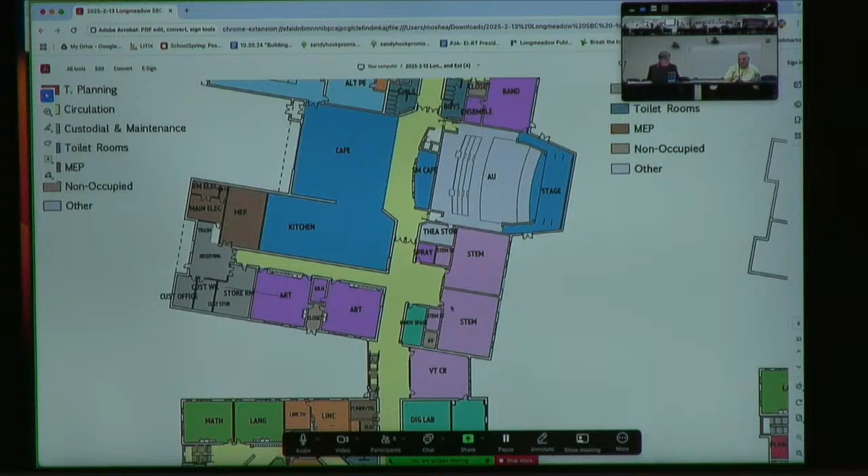Then you get into the STEM wing, which has an open classroom and two engineering classrooms. Those engineering classrooms are connected to each other and to the outdoors, with a plaza outside and some additional support spaces around them.

And we have an area in front of that which will allow that to spill out. We wanted those classrooms to be intentionally on display. They have a lot of really active learning going on, and they are closely connected to the art classrooms. The art classrooms wanted to be in this area and near the loading dock because they bring a lot of materials in and out, and they have a nice courtyard near them that they can access.

We met, and we'll be revising these plans further in terms of some of the minor details, but generally these configurations are working. We're in the midst of revising our kitchen plan, so the details aren't there, but the intent is you would flow into the cafeteria to the left, and there'll be a servery spilling out from the kitchen into the cafeteria area.

We're trying to work to create a bit more of a scrambled type eating area that gives students more choice. The idea being that if they have more choice and more options, then they tend to eat what they want, and then they tend to actually eat it. It's a really good thing.

The cafeteria, even though you see that yellow circulation path, that's open all the way through. At the district's request, we've created a slightly smaller space, part of the cafeteria that is a little bit quieter for students who want to not be in the tumult of the main cafeteria space. So we'll have a variety of seating, but also a slightly distinct space, and it'll be open to the cafeteria. It's not an enclosed space, but it'll feel a little quieter with a lower ceiling.

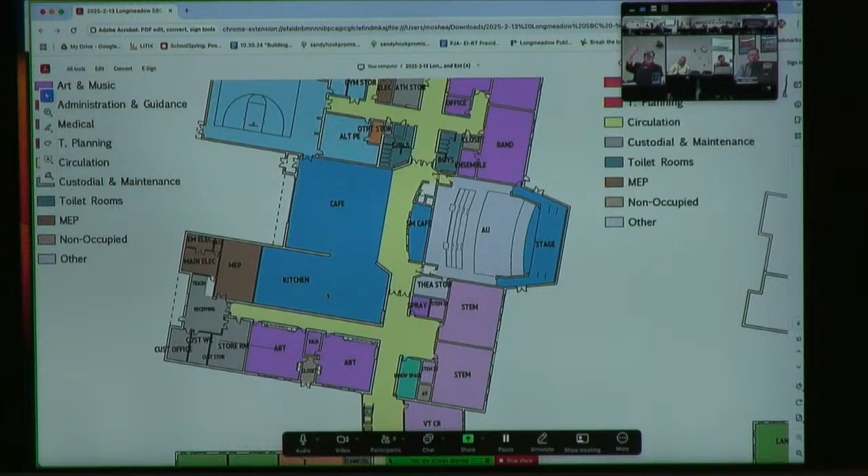We have our auditorium sized similar to the Glenbrook Auditorium, about 400 seats. So that's kind of coming along. We've tried to design this in a way that doesn't have an extremely expensive catwalk. It's not a high school auditorium, but it does have full seating, 2 decks sloped towards the stage, and the full 1,600 square foot stage.

Then you have band, music, and chorus, which connect to the auditorium through the band room, so there's kind of a back door in. And you have your health and PE wing: 2 health classrooms, support spaces, an alt PE room, and a gymnasium, which we've brought down a little bit in size from where we spoke. It still meets our court sizes, and it'll have some built-in bleachers, but since it doesn't need full high school size bleachers, we could bring it down a little bit in size.

Moving to the second floor.

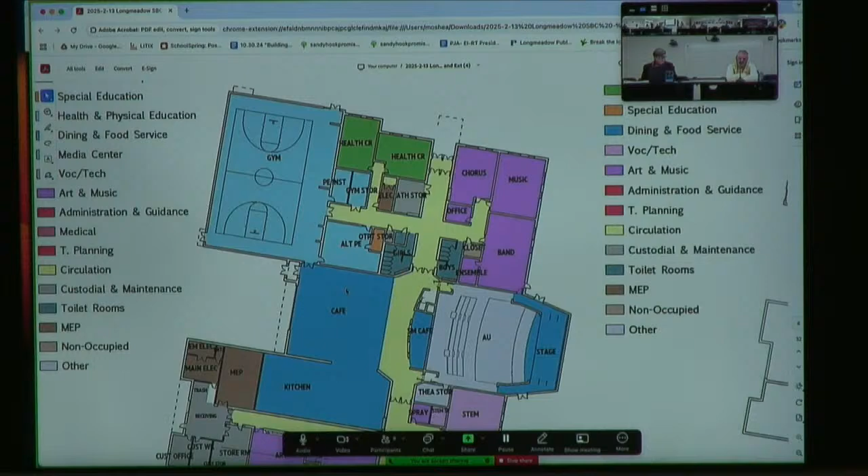Can I ask questions about this? Sure. This is what I learned from Chris early on: less angles and jags, everything is less money, right? Every corner costs money. So, like the STEM rooms, why aren't they just extended out to eliminate corners, or the next one too? You'll see when we look at the elevations and the massing, part of it is about the different roof locations and we're in a residential location. So remember, we didn't want to make a giant rectangle and just extrude up. Okay. For a couple of reasons: one is it would really overwhelm the neighborhood, the other is that you're actually trying to get light into certain spaces.

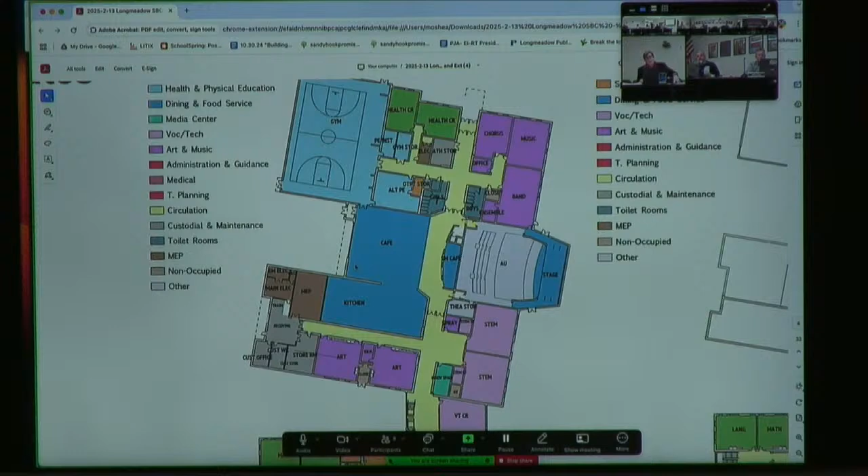At that particular moment, what we have is we've combined the gym, the band, the auditorium, all of that into pretty much one large mass. And then we're separating it, and we have another structural system for the next mass, separating it, and another for the next mass. Those separations between the 3 masses allow us to get light into our classroom spaces from the north and the south, and then allows us to efficiently put a lot of the rest where we don't have those needs together into one large efficient mass. Okay, and if anybody else has questions along the way, feel free. Some of the undulations are helpful when we're working on the exterior.

Just real quick, thinking about the band versus music, do you mind just clarifying the difference? Is that just to store instruments, or? There's 3 totally different teaching spaces. Chorus and music is just a standard all sorts of music program. Chorus is specifically chorus. Band is band and orchestra, so it's a large instrument room that seats typically about 50 students, with large instruments within the room. And because you have two instructors using that large instrument room, band and orchestra, there's also a small office that allows them to connect.

So we're trying to support chorus, band, strings, and general music in that space. Good question. Any other questions on the first floor?

Okay, on the second floor, starting. Oh sorry, another question. I know we're talking about bathrooms later.

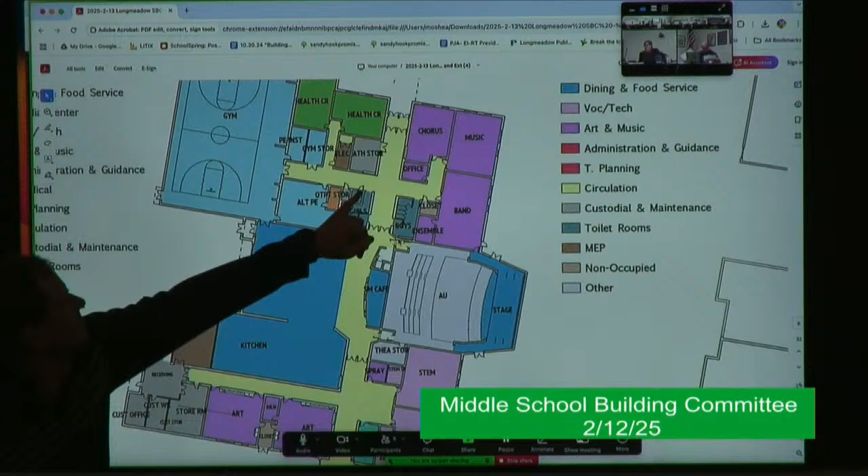Is there a gender-neutral bathroom? I said boys and girls there. Is there a separate space? So when you look at that area, we have a need for a lot of fixtures because we're near the auditorium and the gymnasium, so we went through an extensive review of bathroom options and approaches with the district. We're going to show you the end result in this plan. But wherever you see those gang bathrooms, you'll also see a non-gendered unisex bathroom associated with it. So that's evident there, but it's also evident in every wing.

If you look at what we call A wing in the south, and B wing, same thing - the decision was to have a male side, a female side, and a unisex bathroom all together so that it's in proximity to each other. We've reviewed different ways of configuring that, showing different options on the sink configuration, but we've also settled that decision.

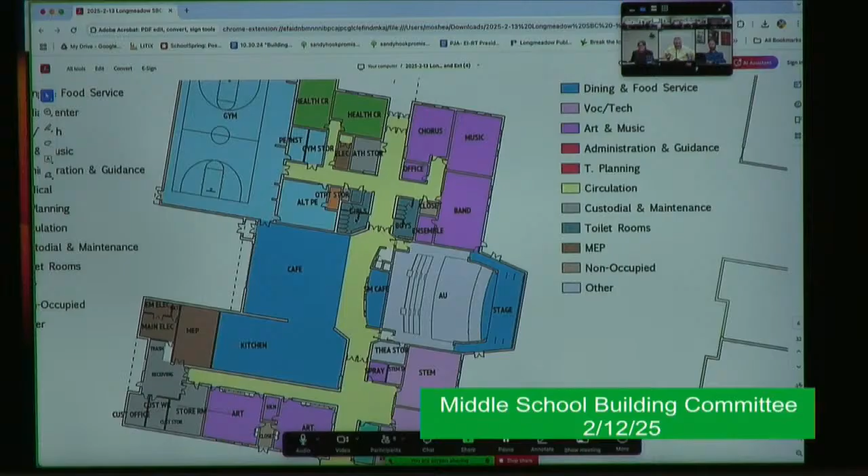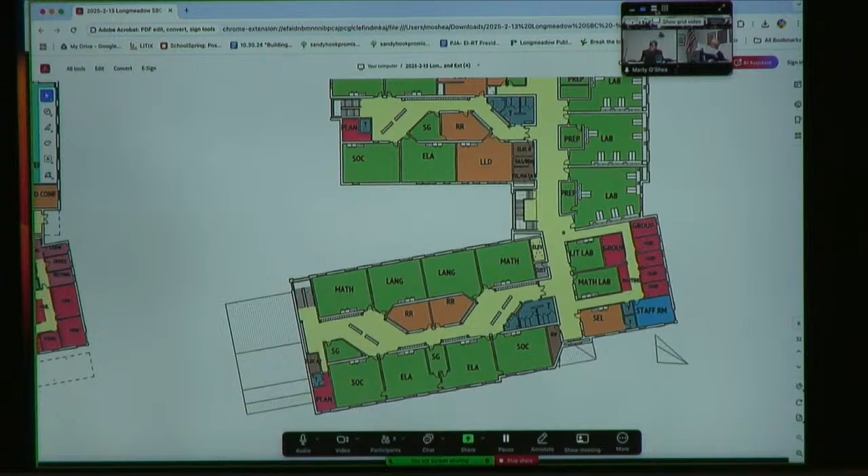Over the admin you have intervention, academic intervention areas - a literature lab, a lit lab, literacy lab, math lab, social emotional room, a staff break room, and the guidance suite. And we're going to switch social emotional and staff room - that was a discussion we had today - but that is kind of trying to be a bit quieter for students to pull into.

We've organized the labs into a sequence of pretty efficient spaces. All of these have to meet MSBA guidelines very strictly, so we found this efficiency would really help, and that's again why we have that second set of stairs. Each lab has its own 200 square foot prep room for storage and preparation of materials to go into the lab, and then there's one chem room that they share that's a locked storage room for chemicals.

So to be clear, the 4 labs you're seeing here are the 4 science rooms for 7th and 8th grade, 2 per grade. And the 6th grade science rooms are attached to the teams on the first floor - that 6th grade science section is a 1-story section of the building.

What about the guidance, is there 4 there? 4, and that would incorporate school adjustment counselors and school counselors. My language hasn't shifted over, but there's more counselors than guidance these days too.

There's an elevator in that A wing as well, serving the second floor. And then across from the 7th and 8th grade science lab is the B wing, which is the 8th grade second floor. And the elevator will not be used for storage, Nick.

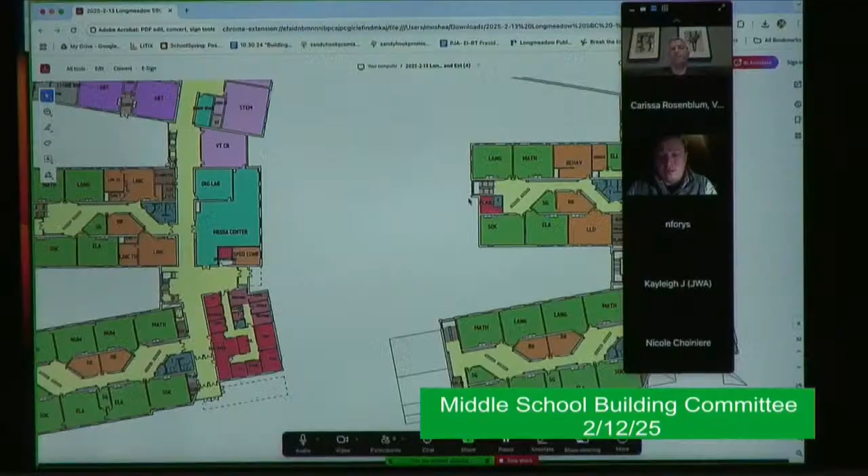I just want to acknowledge that Nicole is on the line. Choiniere, right? There she is.

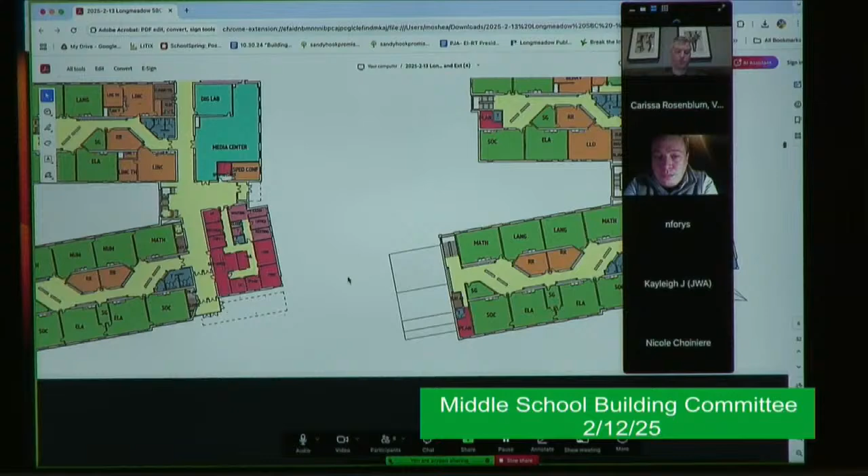Thanks, Nicole, sorry, I'm here. There's that special education conference room on the first floor near admin that is there intentionally to support family meetings coming into the district to meet with district staff. So there's two conference rooms. One is within admin, the other is going to be available probably for other reasons as well, but it's very heavily needed that there's a conference room to support those family conversations.

And I love the records right next to the room, so that's awesome. Yeah.

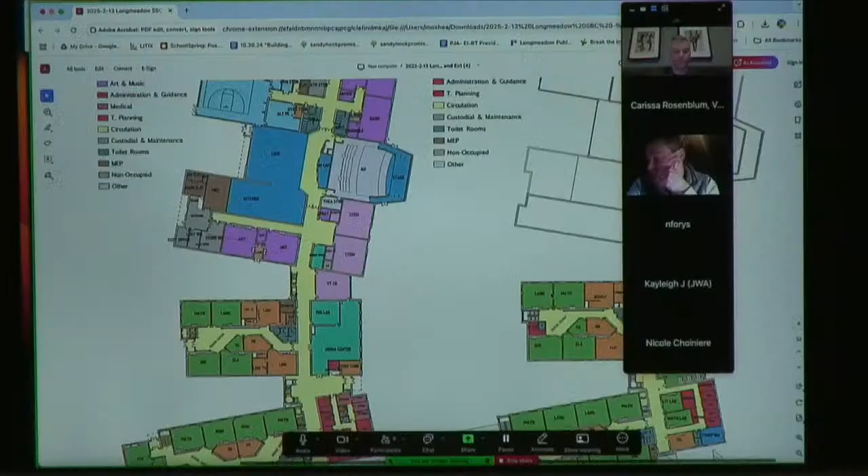Question, Tori. In the labs, I assume on the bottom those are like wash stations. What are the squares with the X in them? In the labs, on the second floor, exterior wall door. Yes, those are sink locations. So the way labs are designed, you can see on screen. These here? Yeah, so these I assume are sink spaces? Yes, exactly.

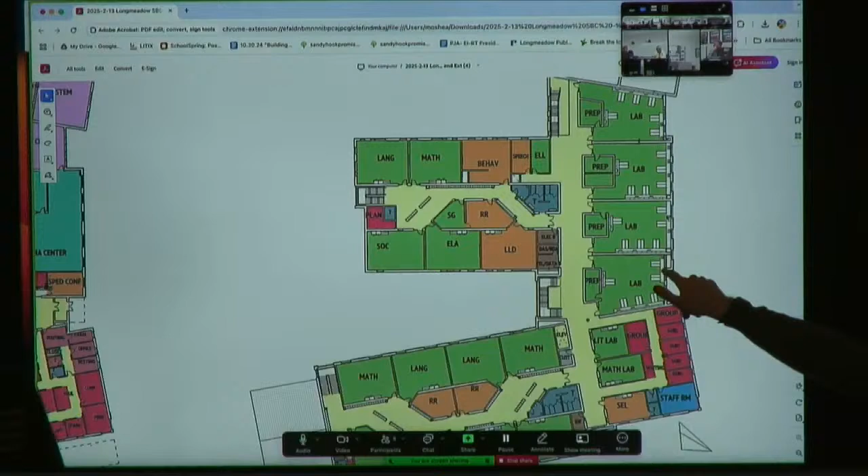The way it works is those parallel tables that are up against the wall are on wheels, and they're either in the middle for teaching, engaged with the teacher, and then they're rolled over and connected to the casework, which is at the perimeter. So for every group of four students, there's a sink.

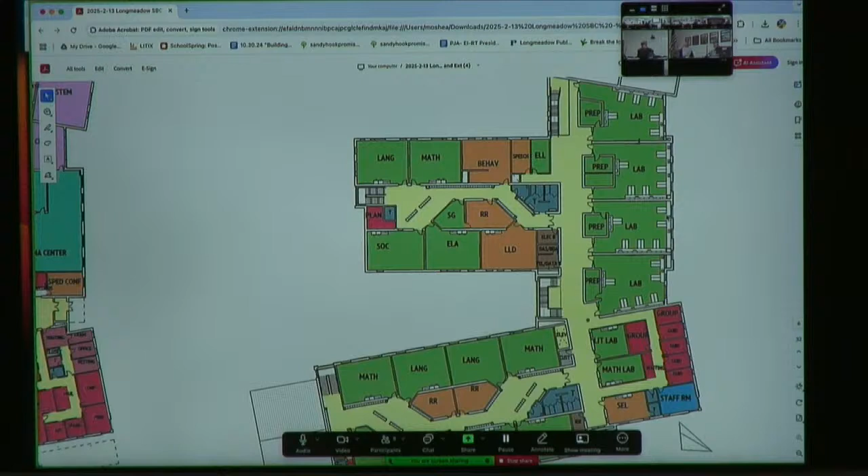Gotcha. It's going to be interesting, our most crowded spaces right now, at least at Williams and even at Glenbrook, are our science rooms. So these are going to be so much more comfortable for science teachers and students. Yeah, they're 1,400 square foot rooms, good size.

Which is within the allowance required by the MSBA. It's like triple the size of the Glenbrook one. Yeah, they're needed.

Next month we'll show you some interior perspectives. We're developing those now. We tend to approach material and color decisions from the outside in, so today we're going to spend some time talking about the exterior. But first we wanted to bring in our landscape team to talk about some site options. We often present two ideas to give you things to think about, and Brian from Halvorson Tighe & Bond is going to share his inspiration and thinking behind the site plans. This is conceptual at this stage, but important to the learning process.

Hello, everyone. I'd like to start with precedent images, inspirational pictures, so you get an idea of what some of these spaces feel like when we actually show you them in plan and in detail.

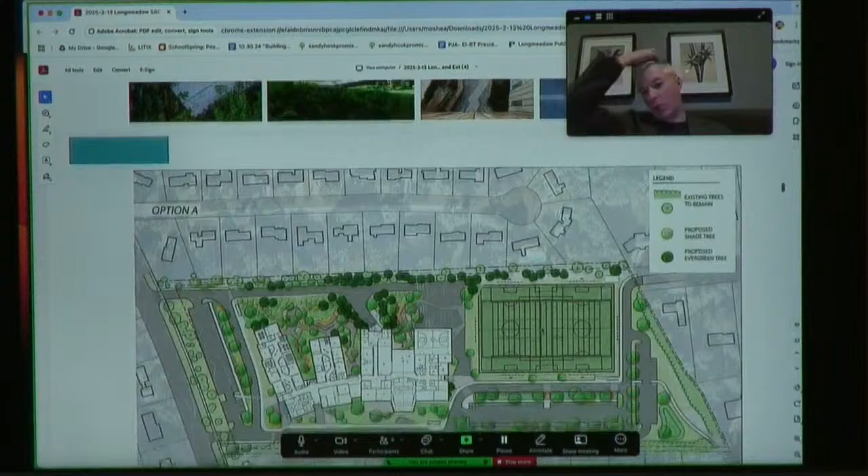This is the overall site plan for the first option. I'll focus on the interior spaces on the next slide, but wanted to touch base on the overall site plan, which is the same for both options aside from what happens directly outside the building. We've talked about play fields, showing high school size soccer and football fields, and now we've introduced U12 size soccer fields running perpendicular. We're showing it in a different color because we may be discussing synthetic turf tonight, and we have a specialist from Tighe & Bond here who can answer specific questions. We also met with folks about netting needs, high netting, shown as dashed lines around goals and such, so this should accommodate all the town's needs.

Parking lots are pretty straightforward. We have larger islands around the parking spots, with the desire to introduce bioswales or rain gardens as a means of infiltrating stormwater on site in an interesting manner. You can get a general overview of the site here, all the green spaces, and where the hardscape spaces are in relation to the gym and so on.

Before we move on, one comment: the trees shown in circles and light green are all existing trees to remain. I want to be clear about what's proposed versus what's existing. Within the site it's almost all new trees, but around the perimeter we plan to supplement the existing tree-buffered edge, particularly for loading docks and similar areas, with evergreen plantings and other trees to really create a strong buffer around the site.

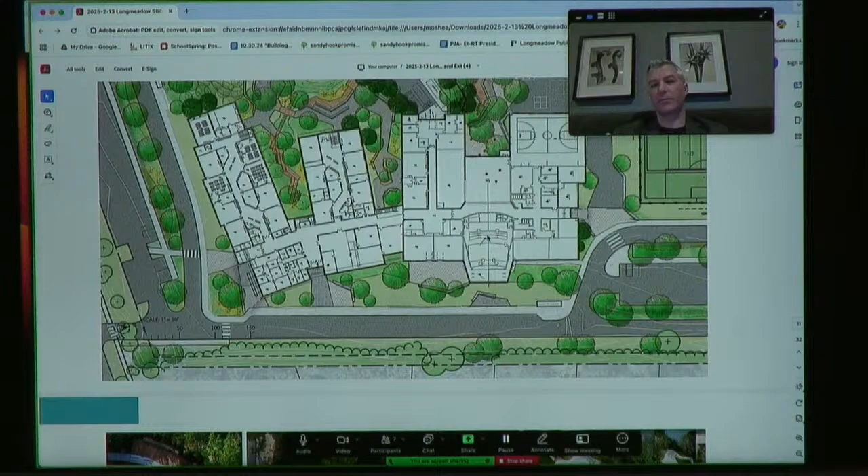Before we go to option B, any questions on the site plan in general, and also on the turf field? That space has changed a little bit since you last saw it. We had a meeting with representatives from the district and also from the town rec side of things, really taking a lot of their input into account. They see this field being used a lot, and the field at Williams right now is not in very good shape. With the amount of use they picture on it, even though some were a bit torn on whether turf was the answer, purely from a matter of use that's what they were strongly recommending.

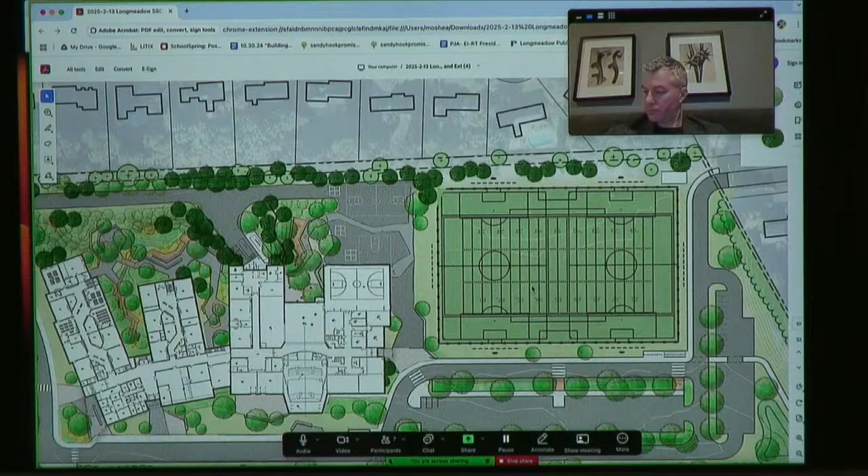So we've tried to open that space and make it as flexible as possible. We're showing a short chain link fence barrier between the turf and the rest of the site. As Bryan mentioned, we're showing some areas of taller netting for lacrosse balls in particular, but for all uses of the field. There was interest in fixed field goals for the football field, on the left and right of this image, but otherwise trying to keep everything as flexible as possible.

Seeing no questions, we can move on. Great, all right.

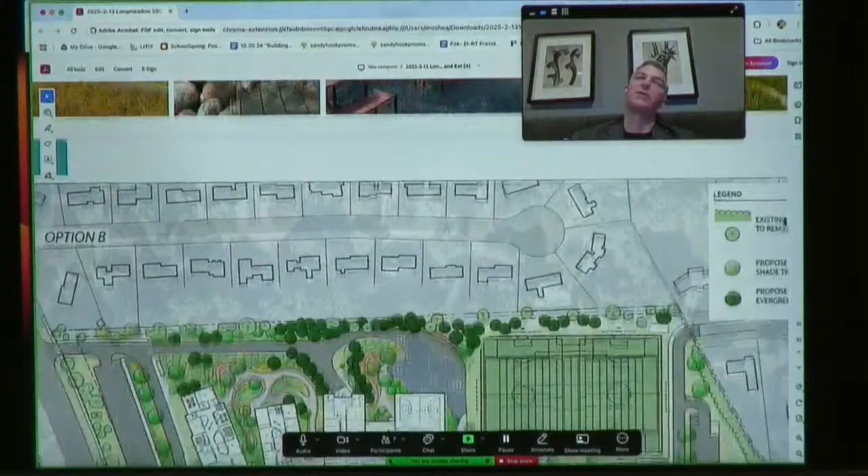Zoom in a little bit, lower row. I guess these are all very similar in nature, so kind of looser plantings, looser curvilinear path systems, and we can move to the next slide to show you what that could look like in plan. Again, the uses and things that we noted are all very similar, it's just sort of different forms here.

So let's see, George, do you want to start at the back of the school as we did the other one? Sure, actually that would be the next slide. As I mentioned earlier, this overall site plan is essentially exactly the same as the last one, only the spaces directly around the building have changed between these options.

Are you looking to understand tonight whether we favor the curvilinear approach versus the more angular design? Is that part of the feedback you're looking for? That'd be great, general thoughts on that, and if there's anything that sticks out specific between them that interests you. These are all still early sketches to develop an approach and attitude, and certainly to find out if it feels like too much or too little.

I wanted to ask before you got too far into this, Bryan, if you could talk a little bit—there's been expressed concern about the soils in this area being not super viable for keeping things growing well. I don't know if that's just overused, but we know there's fairly sandy soils in this area as well. Is soil improvement potentially part of the process, and how? Typically it is.

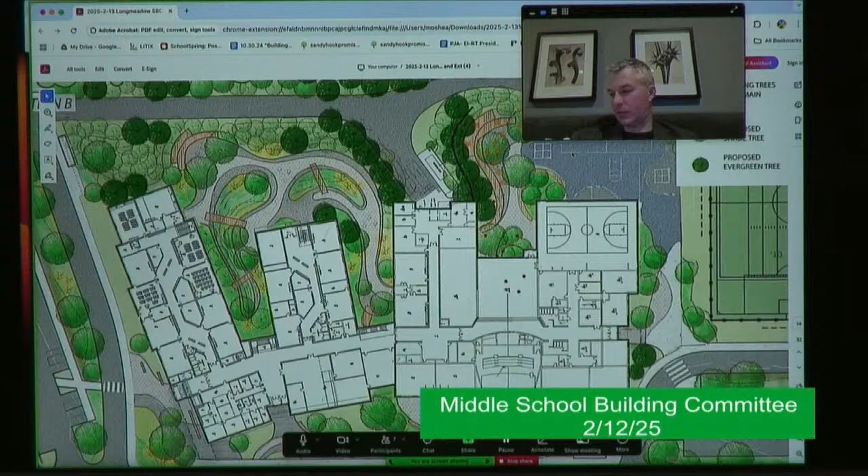We can test what exists out there, and then it's amended for use in planting soils or on fields. If there's concern with lawns, for example, or play fields, we would always specify a particular soil blend that's more durable for high-use lawns, which means they might have a higher sand content and drain quicker so they don't compact easily. But in these areas, if this field becomes synthetic, we'd probably use just a typical passive lawn, not necessarily reuse of existing loam on site. So that would be tested and amended to be appropriate for all of these uses.

Questions, feedback, or comments from anyone? Good. All right, should I move us along? Sure, yeah.

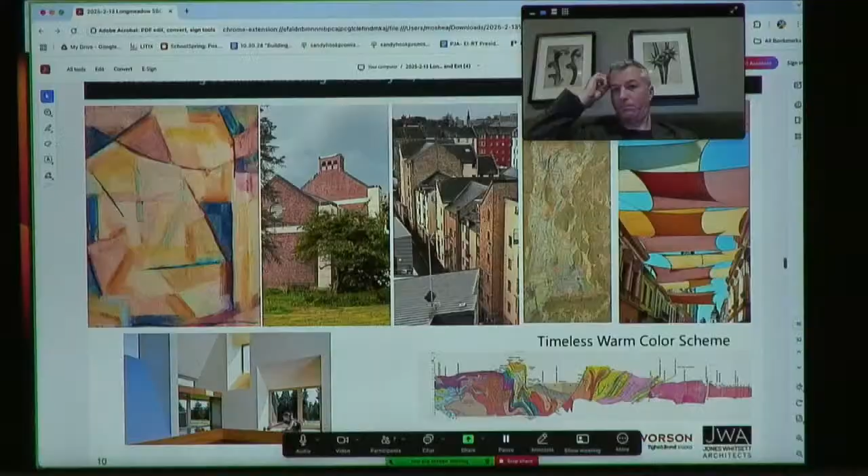Color schemes—if you could zoom out a little bit more. So now we're switching to talking about the exterior. Any other questions on the site plans, or any strong reactions to the site plan? Any thoughts on the curvilinear versus the more angular option A and option B?

I see in option B there's a lot of space to clear snow. Those pathways seem very, very wide, so I'm curious about the time it would take to make it safe in the winter.

On option B, that's an interesting question, Nick, because part of that is we'll need to have a discussion with you guys too, because we'll have to clear paths where we need it for egress. Or are there specific areas where it's easier to clear, where you guys would like us to think about that? So I think we would want to overlay a diagram on top of this thinking of where we would clear and where we would not.

The epoxy resin aggregate surfaces that we talked about are pretty durable for shoveling and snow blowing if we needed to. That's what I was trying to research right now, find the answer.

Yes, absolutely. It was just installed on City Hall Plaza in Boston, so you can imagine how much abuse that space takes. It's also on the High Line in New York City—you may be familiar with that. That's been installed.

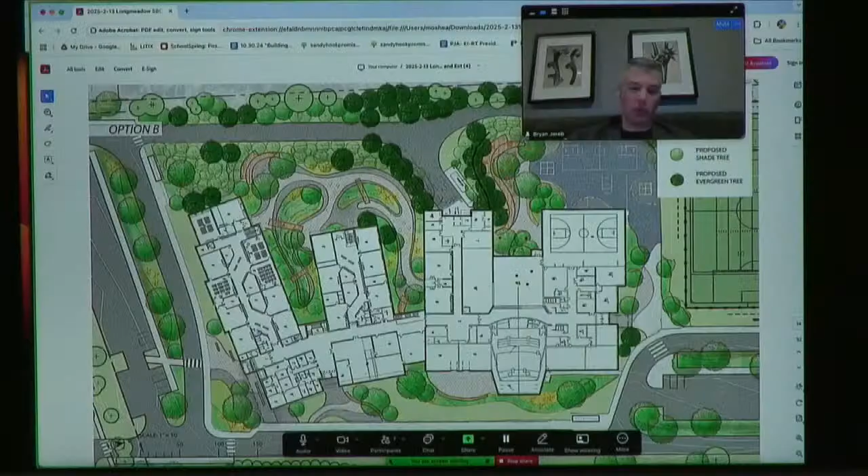Yeah, so in both options, we have mounding adjacent to the fire lane, screening that and enclosing the green spaces everywhere for comfort. They generally slope to the middle of that space behind the school, so the low points - you see those little rectilinear forms behind the school? In this option, those are bridges, so you can imagine those as depressions. Those are the rain gardens or wetlands that kids can walk across, run across, and interact with and learn around.

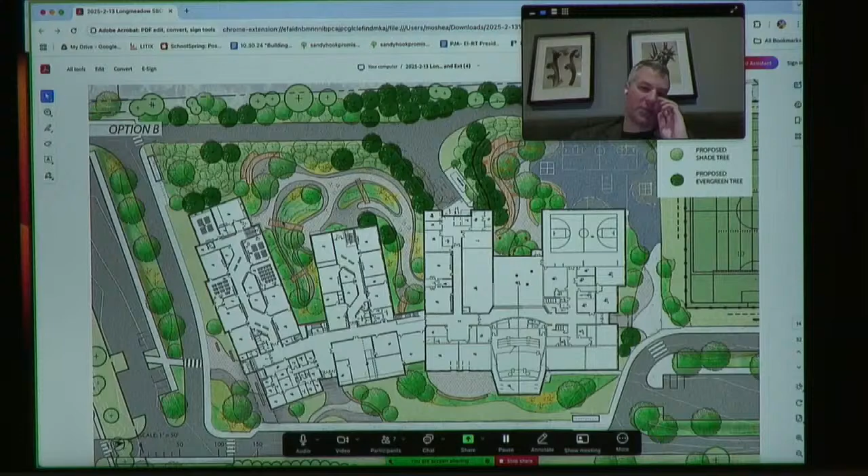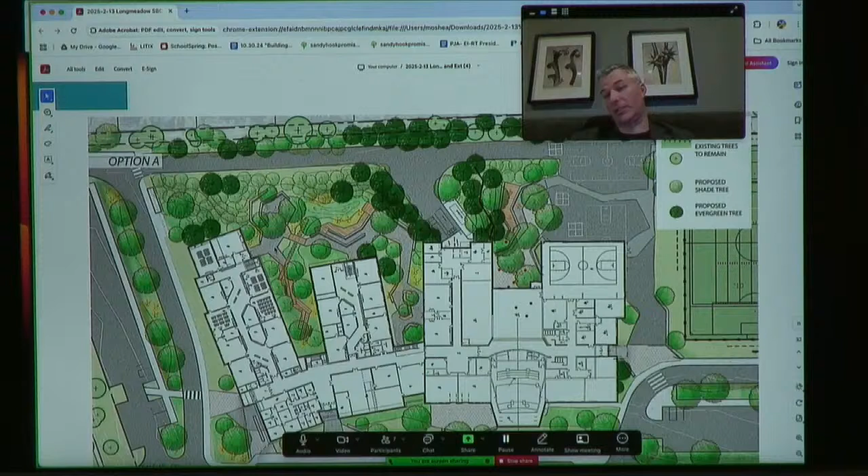The other option actually put the rain garden elements closer to the fire lane, so you don't have the bridges and the path systems. The depression is closer to the fire lane there, so the seating features and things look out at it instead of crossing it. There is a little bridge indicated in one location there, if we get there.

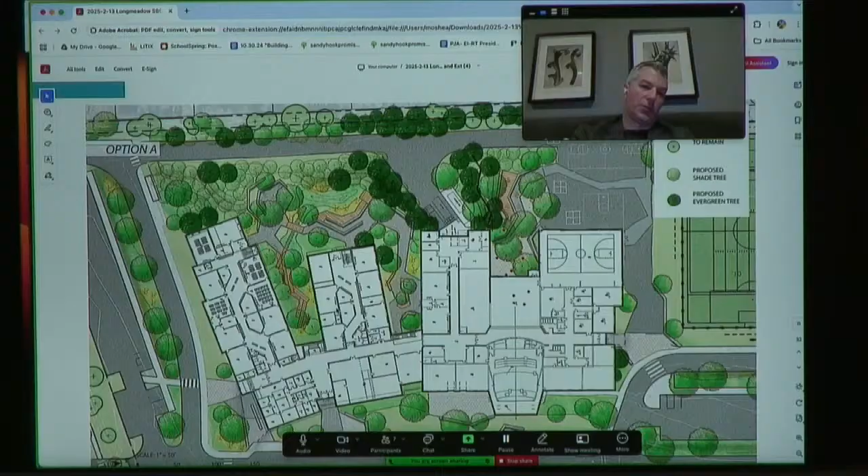So yes, everything will be pitched to drain, from a stormwater perspective. If we need to have catch basins between the wings of the school because we can't pitch out, that can be accommodated and will either infiltrate within the rain gardens or our civil team will address the stormwater on site.

I was initially drawn to the curves, and I like the bridges, that idea, but I don't feel terribly strongly about it. So I'm glad Nick made the first comment, because I think I would just say whatever can keep looking good the longest, or for the long run, because I know Boston City Hall has a team of people that keep it looking fresh, and we just don't have that. Or we do, but we don't have the same kind of resources. So whatever we can do, but I think they both definitely have their perks, so I don't feel too strongly.

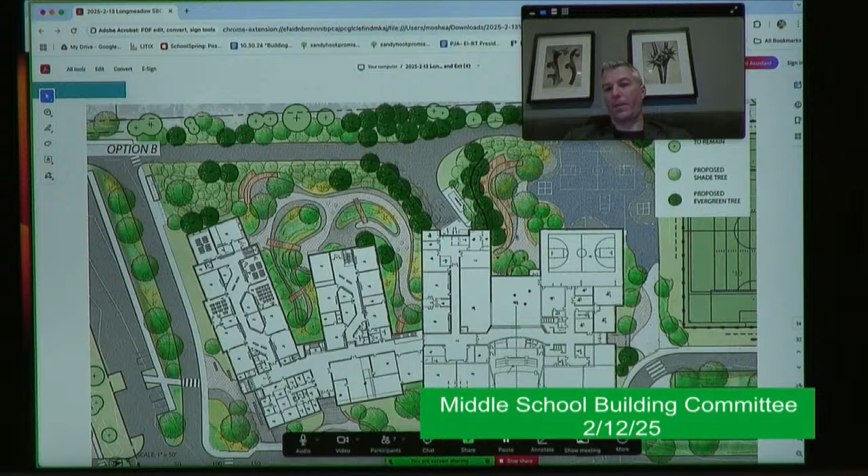One feature that was interesting to talk about with the leadership team is outside of the cafeteria, you see these S-shaped curves and the amphitheater. What they're doing is sloping up, so you have one level of seating and then another level, and you can walk up a bit of a grade. That interested the principals, because it allows a staff member to walk up, look down over, and see. It's not a massive grade, it's very gentle, but still gives a bit of a view over the play area. So we talked about being sure that didn't get heavily obstructed, because it would be really helpful to see across that space.

Yeah, supervision and sight lines are other factors I'd want to learn more about, particularly in the recess outside dining area there.

Yeah, we tend to also encourage the team to keep trees away from the building, because when a district isn't maintaining those trees well, over time it can add moisture to the building if they're blocking it. So we'd be mindful and careful that that wasn't the case - that's something we see in existing schools all over the place.

Ready to move on? Sure. Okay.

Ways back, we showed some historic images and spent some time walking around looking at buildings in the community. We're always looking for a way to get at this question about what kind of materials, what kind of feel the school should have. We're going to show two options, two ways of thinking we've approached it. In one, I spent a lot of time reading about the geology of the area and Lake Hitchcock, and why the site is at the bottom of Lake Hitchcock, and the soil conditions and cross sections.

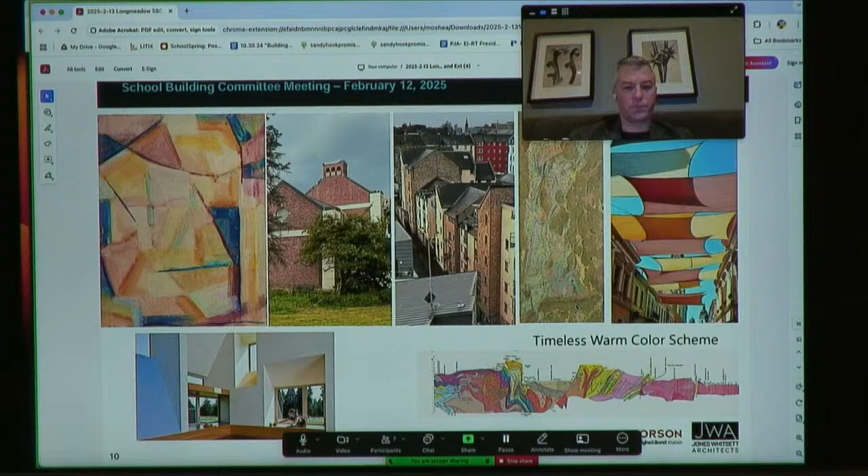We also have sloping roofs, so we wanted to think about how those roofs might be seen, and what that contrast might be.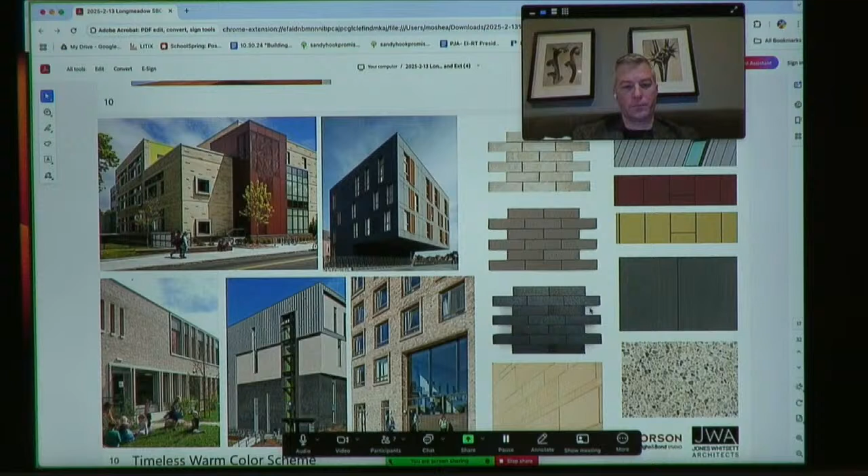Go to the next screen, you see some modern materials that demonstrate some of those colors and how they can be brought in. The one on the left is a school in Cambridge, Martin Luther King. The materials here are brick, which is still the dominant tool for 50-year school building construction in Massachusetts. But there are areas where you'll often bring in a rain screen material as well, which allows you to get a little space from that brick and not just create a big brick block. On our project we have some sloping standing seam roof as well as flat membrane roof, so you're seeing a little bit of those elements.

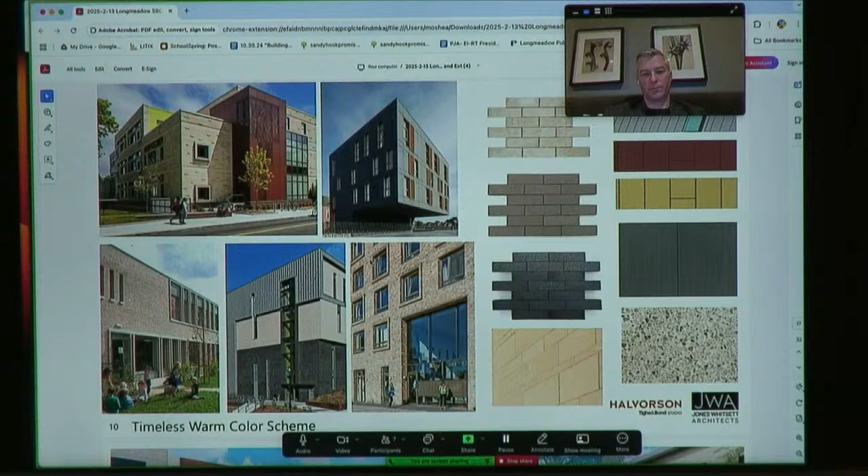Go to the next screen. You're seeing some very quickly done renders of different parts of the building to see what those materials might look and feel like, as a general temperature or gestalt feeling. The top left is helpful because it gives you a sense of scale, since we've been talking about site plans and it's hard to understand how big this might feel.

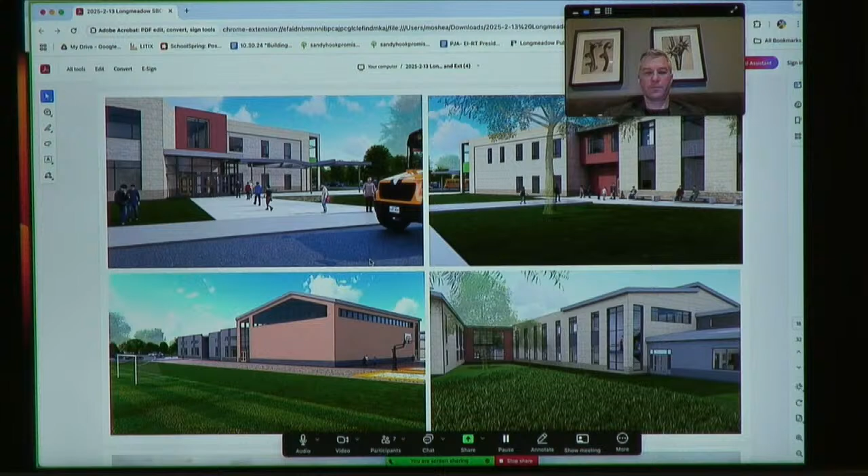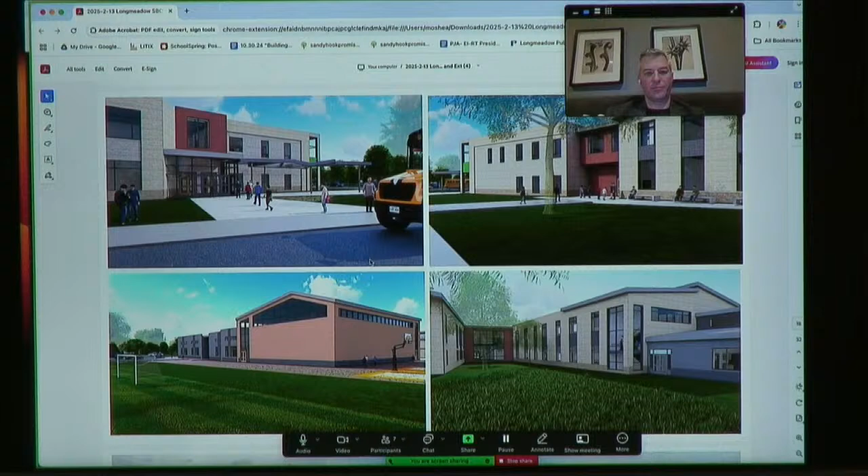What you're seeing at the front is the walkway from the bus drop-off. We want good hardscape there for arrival, but that's also where we have that lawn area, and we want to be sure there's some shade. You won't see all the site features here at all, since we're not quite that integrated yet, but there's something meant to be a canopy to provide some protection. So this is giving you a look at a warm brick scheme where we'd probably do two to three different bricks, very similar and close to each other, just to offset and create a little texture, with a simple horizontal or vertical approach to the windows, and a little rain screen at the higher location.

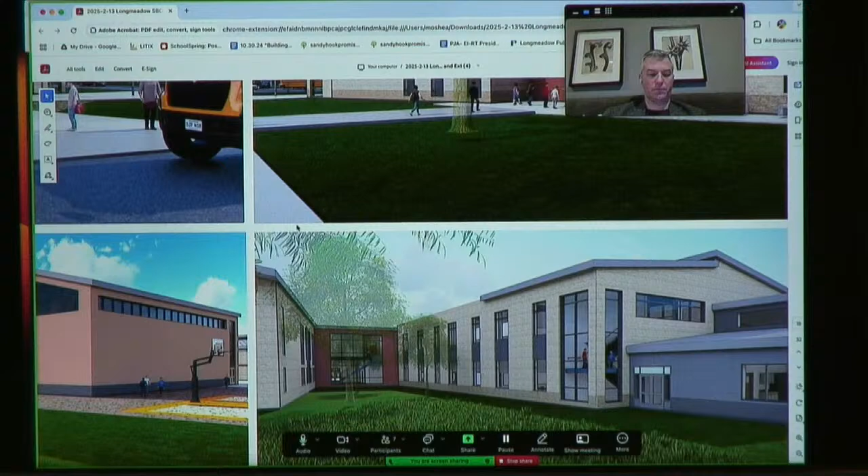To the right, that's where you're asking about the massing, and we have those three distinct masses with connecting points between them. We're talking about those connectors being lighter weight — that's where your stairs are. That allows the building, from a distance, to read almost as three different buildings instead of one giant building. The image at the bottom shows the back of a classroom wing.

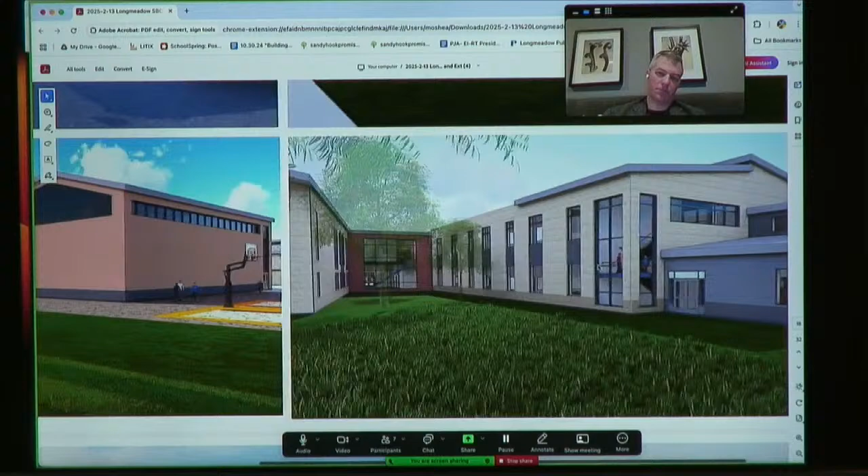You can see how we have those gabled roofs blocking, and behind that is a low flat roof, where the mechanical equipment would be, so you aren't seeing it from the neighbors. It also allows us to bring daylight inside the building at the second floor level. To the right you see that gray mass — if you go to the right-hand image, that's the 6th grade science classrooms and the egress requirement door for that wing.

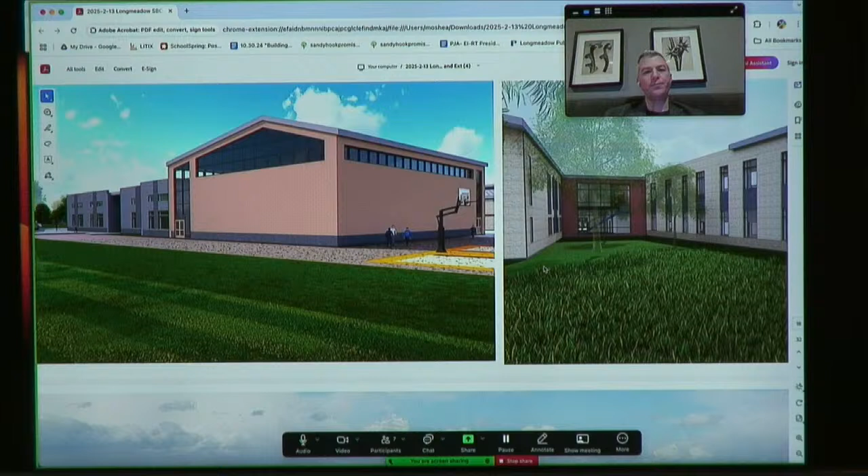And this again is not Brian's site plan, just the concept of low growth plants. This was quickly pulled together, but that gives the scale of the gym. We're thinking the gym particularly would probably be block instead of brick, just to be more economical.

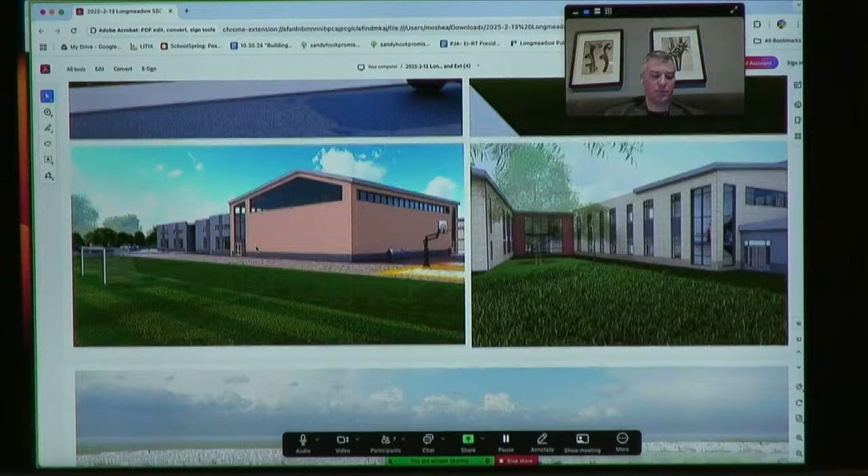We were talking to the structural engineer today about the relationship between the structure and the skin. So we can pop a little bit of color there and differentiate from the lighter brick. And you'll see in the next image that the one-story classrooms at the back want to feel a little different. Overall, this was just put together in the last couple of days to give you a feel for what this warm scheme might look like and feel like.

We've been trying to be mindful of the height and not go too tall, because of the residents looking towards the building, wanting to be sure that from the street it has a pleasant, school feel and is inviting. You always see it from these two angles. From the west side it looks a bit more gabled; on this side, less so, intentionally. So the landscape reflects some of that difference between the two sides of the building.

This second scheme, just to offer some difference, picks up the idea of more traditional schools. Traditionally, schools in the US from mid-century are red brick. The high school has really strong red brick, that's the image on the right. We have other clean white elements in town, so we're thinking of this as trying to offer a cooler palette of materials, and then how that might ultimately carry into the school as well.

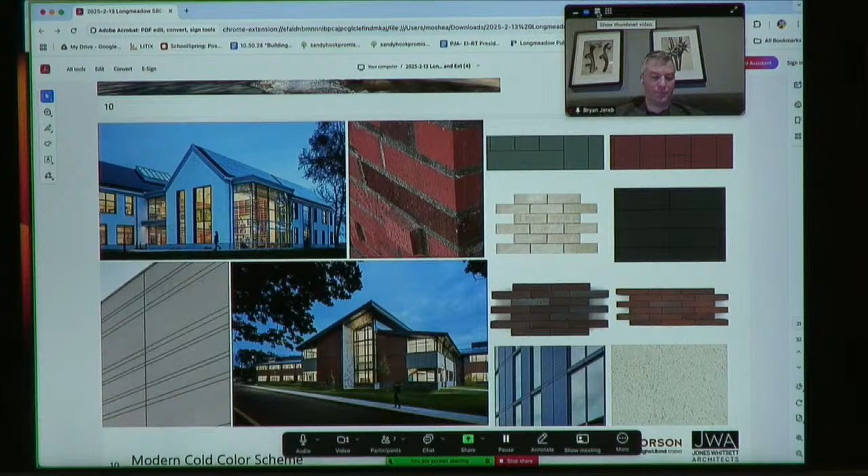Here you see, if you zoom out a little, the whole of this - it's really better as a whole image. That precedent image at the bottom, the gabled roof and brick, is what we were aiming for: that mix of red brick, window, panel, and a slightly sloping roof. So we're just changing colors. In this version you're seeing, we're keeping most everything the same and just changing colors. In reality, once we get into it, we'll do a lot more work on the design and detailing.

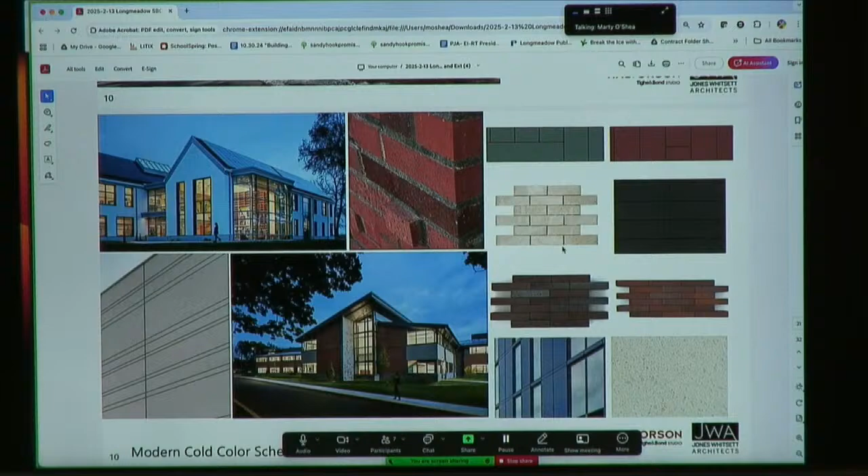So here again, the same four images but with a different palette of colors, so you have to use your imagination a little to picture this as a whole. We were thinking with the panel here, you could carry a slightly brighter color, and you'd want to break the brick up with some relief so it's not just monolithic. That shows you an overall perspective.

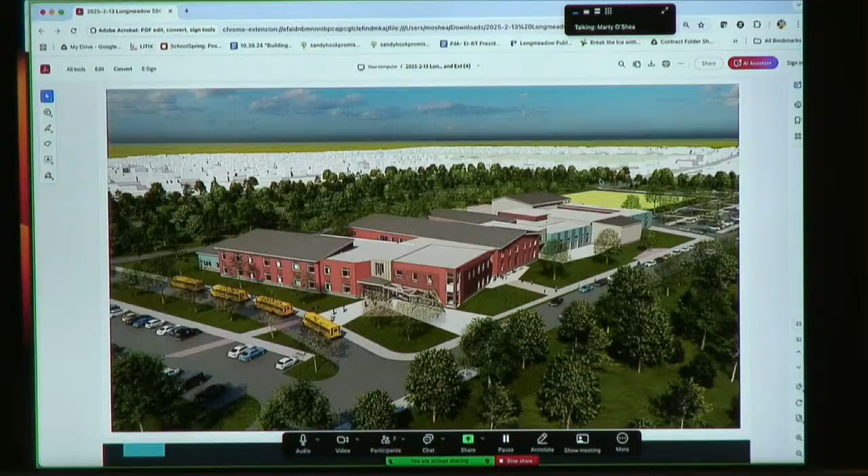So, contrast the two - I know, I should have put them next to each other. It's like going to the eye doctor. Better now? It's different, yeah. Better now. Yeah.

So here we're showing a darker roof just to contrast. What we're also really looking at right now is the amount of different materials, because that's what's going to inform the cost estimate.

Strong feelings at all? Seems like a very personal opinion.

Yeah, I like the warm one, it seems to fit more with the middle of the neighborhood to me. The warm one's the first one? Yeah. I agree with you too, the first one - it seemed more uniform too.

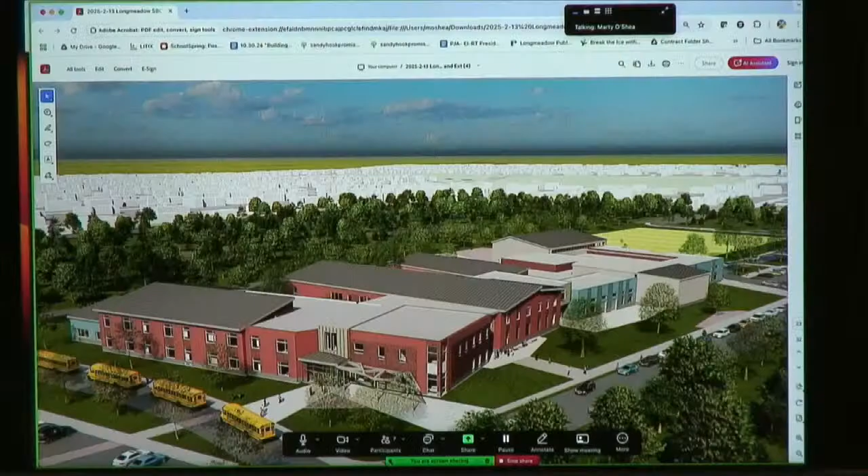In this one, again, I may not be the person to ask, but the colors for the media center, the music wing, and the gymnasium back here - those seem kind of odd.

Yeah, I think they're meant to look a little bluer, because in the close-up images they do, but that image just looks warmer than the others. The concept there is that's a rain screen area - it could be brick all the way, but it gets to be a little too much brick, really.

So here we've used a gray palette back there that matches the roof, and I think the accent colors we can really pick. We're going with the thinking that rain screen is a color-through cementitious glass reinforced concrete product, so it tends to be somewhat muted colors in general. We could go with an Alucobond type panel if we wanted bright colors, but I think our work as a firm is better if it stays kind of natural materials, natural colors, because we like to bring those inside as well.

What is your team rallying around? I know I have an opinion, but I've tried not to overexert. I like the warmer one as well, I'll admit, but honestly I like them both - definitely we could work with either of them, for sure.

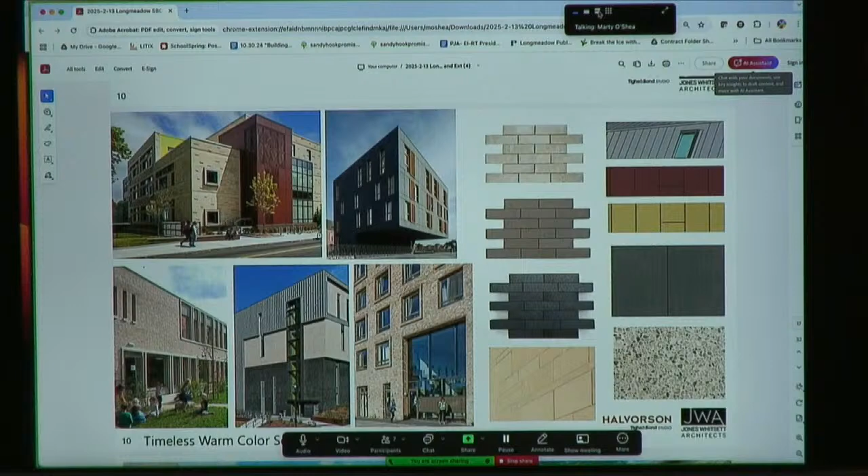Anybody on the phone? This is Carissa.

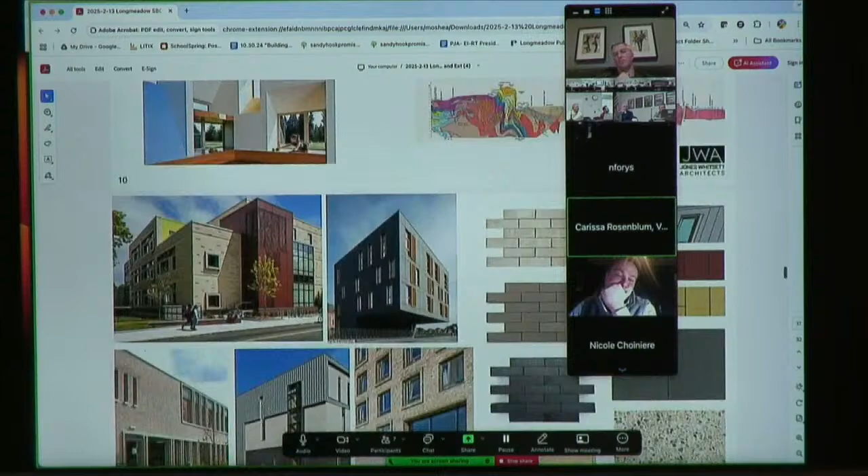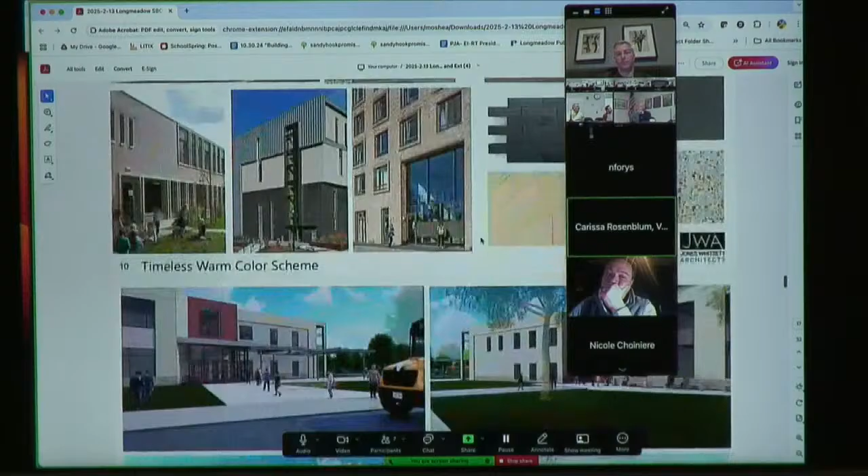When looking at the pictures before we got to the renderings, I was leaning towards the cooler side, the modern cold. But then when you see that giant picture of red brick, I feel like it's a lot. And like we said, in the middle of the neighborhood, I feel like the warmer first option is just going to be a little bit lighter. Yeah, I feel like I'm on the warm team.

Nicole? I would agree with what Carissa said. I think they're both lovely, but for the neighborhood and the space we're looking at, the warmer tones seem to me to be a better fit.

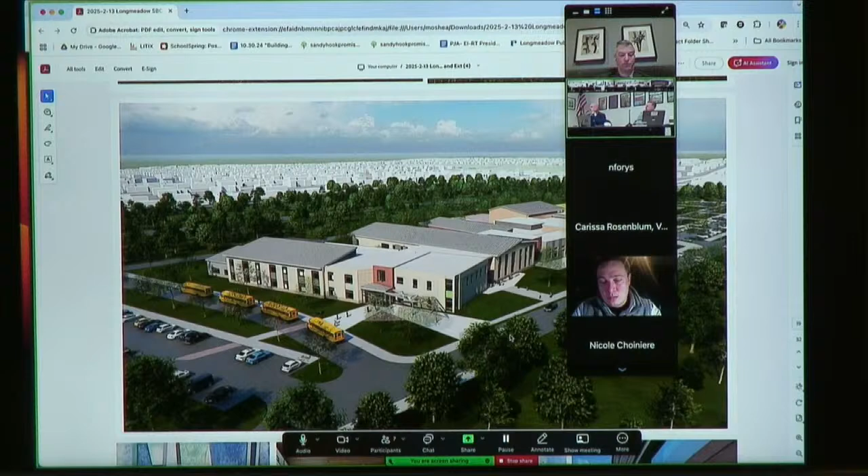And who else is on the phone? Julie? Should get off. Oh, okay.

Chris? Yeah, I think both can be done well. I think the lighter colors are probably better here to give the neighborhood context. From my planning board, a lot of people really like the white, like the shops feel, they really like that building in town. That's what everyone always says, why can't it look like the shops every time we get something to look at? So I think the town would like the lighter, the warmer, lighter.

That's a great point. You talking about one building in particular in town? Every planning board comments, why can't it look like the shops? Everyone can't look the same. We can show you what it should not look like. All you gotta do is go to the old Armadas Plaza and you can see what it should not look like.

Yeah, so that's interesting, because there is that kind of historic character, but then we're finding people are very... this school has a lot of modernist quality, so that interesting play between the two is potentially captured here, and I think that's interesting to me.

Colliers have an opinion? We do not make opinions. How about Alan's personal opinion? I can ask my wife, because... Our scope of work says no opinion architectural.

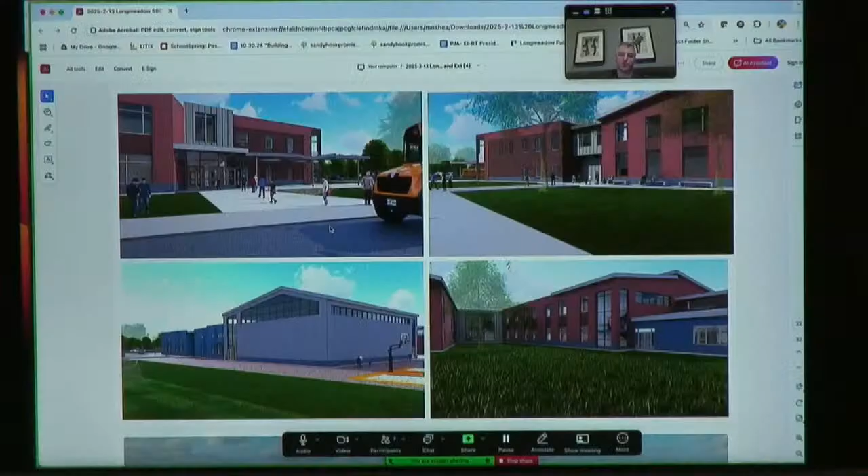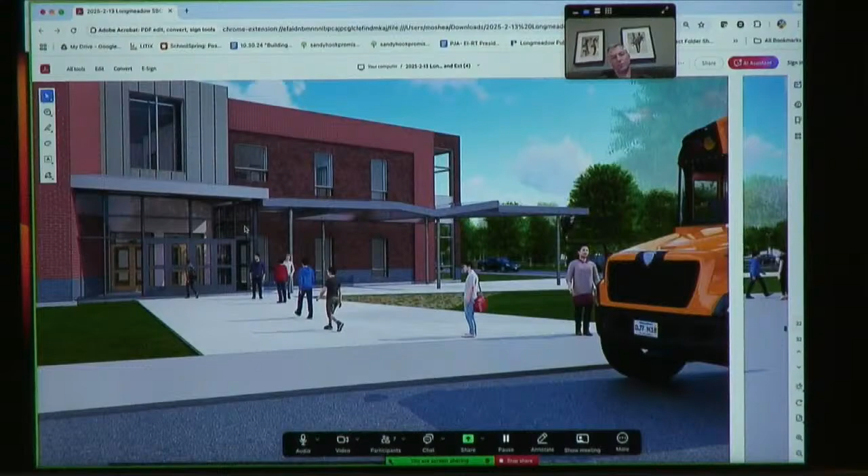That didn't seem to fit for me. Couple options - in the front we played with a kind of sage green that seems to work pretty well with the brick. You see that at the entry there? And the other, when we put blue with the red, did not work at all. I don't think that felt good, it felt like a very industrial feel, whereas the gray works well with the other. I mean, if we had a rendering with the sage on it, I think I might change my mind about what it looks like, because then the sage becomes part of nature.

Is this the one that makes the building look smaller? To me, I think it would make the building look smaller, because then you have the brick part, and then you kind of have the part that blends in.

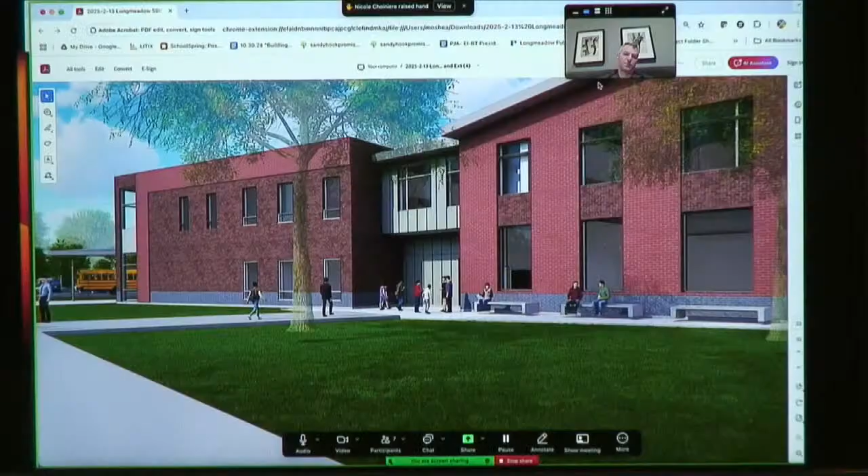Nicole's raising her hand. Nicole? Yeah, I was just gonna say, I agree with Marty about the dark blue - that was really not matching with my mind either. And I do like the sage green more.

I also think when you go back up to this one, that sort of darker red outline is also kind of throwing me a bit. I'm wondering if that could be something that's either a warmer charcoal or brown, or else more of a creamy or sage. I think the combo of multiple different colors of red and then the blue were kind of what was pushing me away from this one a little bit more.

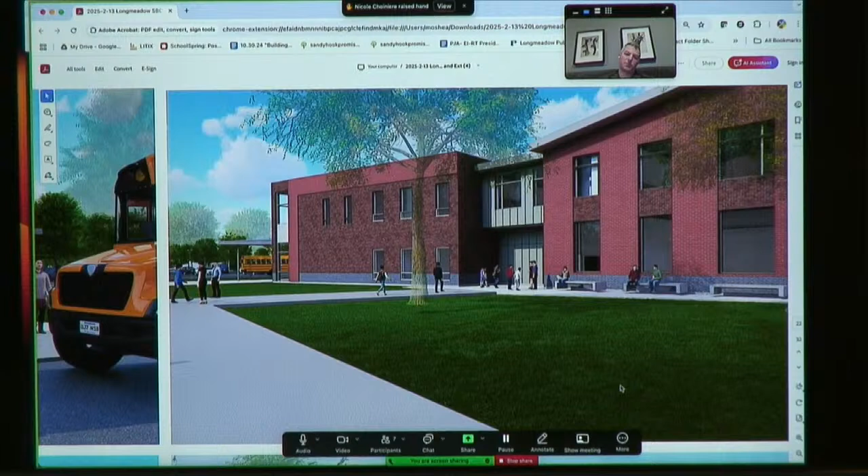I do hear the thought about all of our other schools having brick. Just this brick felt different than those - it felt like it had more of that modern touch and a little bit less of the warmth that I saw in the other one.

I just had one point on the other schools being brick - I had to look up Wolf Swamp School because I guess that and Blueberry I don't really think of as being brick, even though they are. What I think of them as is parking lot.

This is much more - we've got a big public facing wall, and so that, to me, that's a little different. And same with the high school, I guess, because it's just so far back. And I know that, yeah, they are brick, well, for sure, but schools are not in your face like this would be.

Exactly, yeah. And I think to me that's kind of the difference maker - this isn't going to be far back, and we want it to be much more prominent, I think, especially because it's 2 stories.

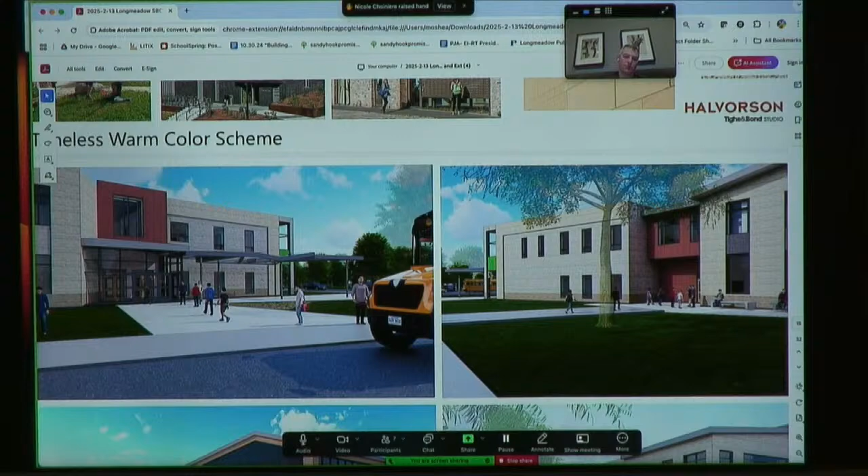So I did hear that supported, which is helpful because we don't want to hold back the next phase of our thinking. These are 2 prominent parts of the building - the entrance in the southeast corner, the main, and then the student entrance along the east drop-off road. Those really appealed to me - I'm not sure I can articulate why.

Can you go to the overall on the warmer one too, just to get that? Because I think that's a really important point about how it's seen when you're driving by and how it sort of fits in the neighborhood, and whether or not there's any concern about that.

I think the elevation - you see the vertical approach to the classroom wing here - that we kind of really started getting into, and how that would feel. So it's not just one wall, but actually kind of mixing in a little bit so that it kind of breaks up that monotony a little bit.

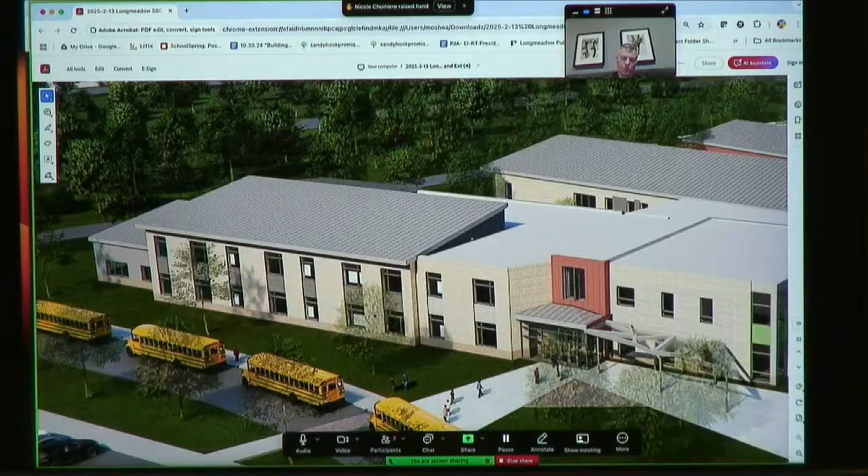I like how it doesn't look like a school from the road. I like how it has that - the roof angles are different. And when I'm looking at it, it looks more like living quarters. Yeah, exactly.

Based on what we've discussed so far with the neighborhood, the more we can get it to be unobtrusive, the better.

Kind of a random question, but you talked about the gabling on those classroom wings, and those windows are north facing. Is that intentional? As much as possible, yes, partly so that north light is gentle, you don't get that strong, harsh shadow effect. It's a very gentle light, tends to be better. It also tilts our roofs towards the south.

So it's more easy for solar, for PV, if we go in that direction in the future. Forgot that's the other reason.

I heard it leaning a little bit more to the warm, but we can explore further. Ready to move on? Unless somebody else has anything to add, I definitely think we had a lot of leaning towards the warm, unless there's some way to mitigate the brick with the blue. Well, there's certainly things we can do. Yeah, I think that's the leaning direction.

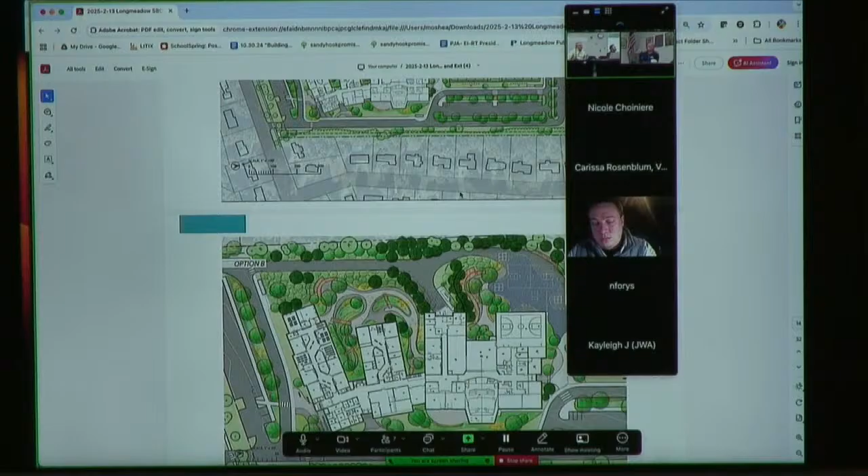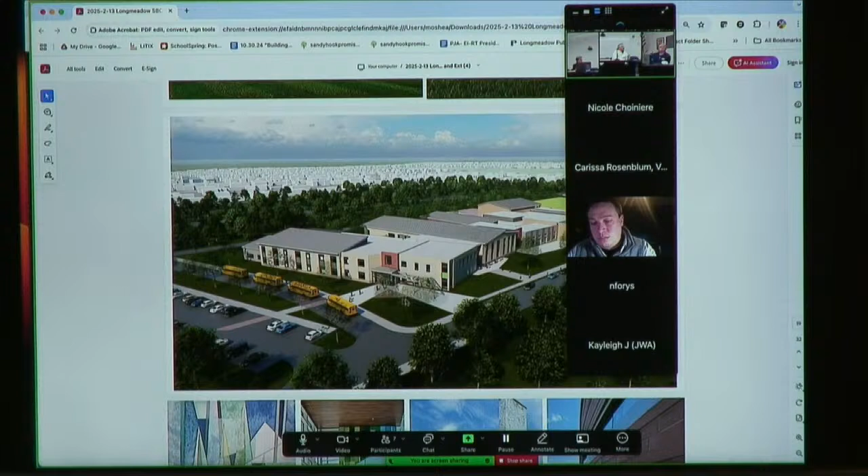Yeah, if you go to the overview again, Marty, I do think the rendering is helpful. If you're seeing the site plan, it helps you with the scale, just to get the scale of the entry area. We had a lot of discussion about whether or not that should be hardscape all in front of the school, and I think here maybe is why I was a little bit anxious about that idea, because I think it would be a lot of hardscape. So it's hard to tell without the scale.

We can't get all of it into that kind of 3D render. We're always building the 3D model, but the landscape team is not. Once we settle in, we will start to bring the contour and build that up as well.

Small point, as these renderings become more public and looked at more frequently, I'd want to make sure that we represent the buffer between the school and the neighborhood accurately. So I don't know if that's the scale, it looks bigger than it would actually be. In fairness, some of it is distortion of perspective, but I wouldn't want to misrepresent what that buffer looks like. The danger of these tools is that you see a lot.

I think that's it for this area.

Turf, did you want to talk about the procurement of turf or not, as far as process and vote or any of that? I don't know if we want to get into it, it's up to you. It's a matter of, when it comes time to vote, are we going to look at something similar to what they did with the pool in East Longmeadow? Would we want to do a vote for synthetic versus natural as one vote, and then the entire project as a second?